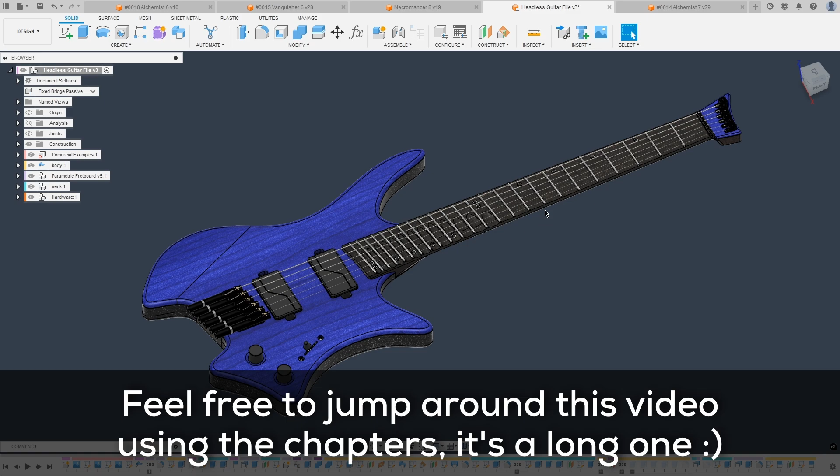Now I'm going to assume that you are already somewhat familiar with Fusion. If you've never used it before and want to get into it, there are many great beginner series out there. It doesn't matter what they're targeted to, you just need to learn the basic tools of sketches, extrudes, constraining your sketches, all of that stuff. If you don't know that before starting a guitar build, you're going to be in for a world of trouble, as there are a lot of components that quickly add up, and if you don't have the fundamentals down, it's just going to be one big mess.

But if you want to still have a guitar file that is fully functional without having to model it completely from scratch, for the first time ever, I'm actually releasing a fully featured headless guitar design. Now, I have modified it slightly from my designs, as I do sell those as built guitars, so I don't want to give you one of these direct design files where you can just send them to the CNC and build an exact copy. Instead, I want to motivate you to take the complicated bits of modeling, all of the joinery and everything, but then just modify the shape, create your own headless shape. It doesn't have to be worlds different, just a little bit different, and that way we can continue to evolve and everybody can have their own look. So that is basically the only thing that is different.

It's just the outline shape compared to the models that I use as well. It also has some basic configuration options here, like you can switch between fixed bridge and tremolo, and when you select that, it will automatically play some tricks in what it hides and unhides in the timeline. I will go more into that later. And then here you can see that's the tremolo option, and you can have it active or passive. That just adds or doesn't add to the battery cover here.

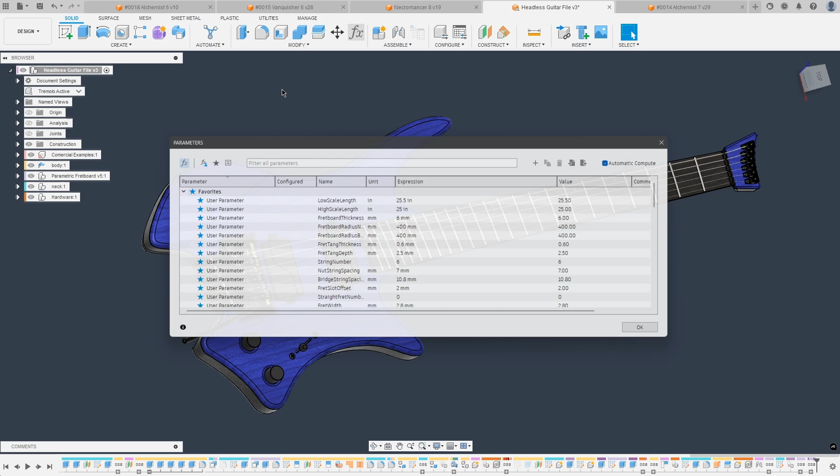What you can also change in here are a bunch of parameters, like for example scale length and various other things like that. However, changing some of those will somewhat break the model in some cases where you have to go back and fix a couple of steps. But I will show more about that later in the video as well. I just want to show you that you are not stuck with the basic design. It's quite adaptable as far as possible. I made it parametric, but with such a complicated design, it's not always possible to keep it fully working all the time.

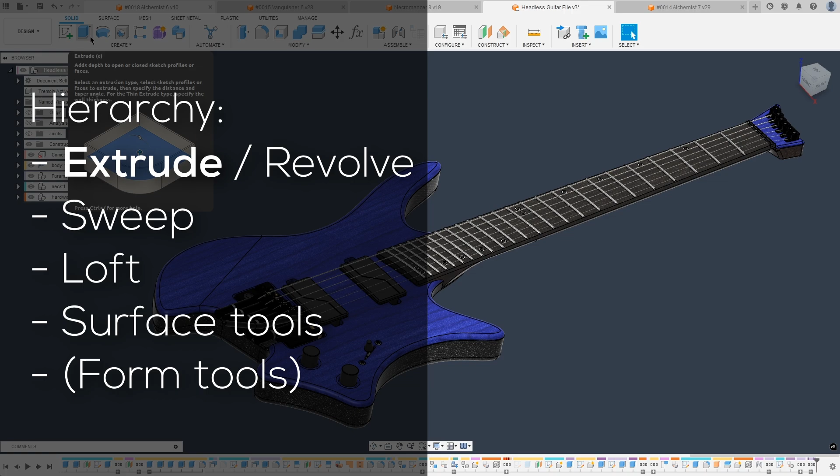The basic hierarchy in terms of how stable the feature is, how parametrically reproducible it is — Extrude is the best. You just have a geometry and say how far, all that good stuff. Unless you go into the sketch and start deleting lines, it will basically not break. When you delete lines, you may have to go back in and reselect some stuff, but even that is easily fixable — there's basically no way to screw it up.

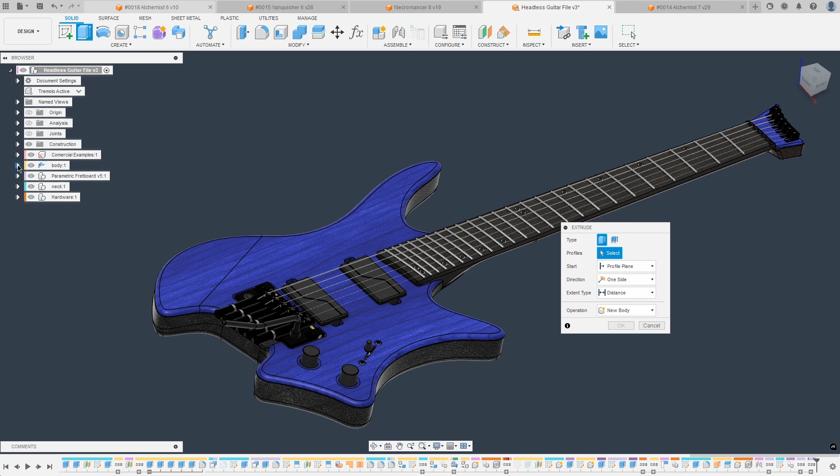A couple quick things inside the extrude menu. Most people will just use it like this — if you have the main outline, select something and extrude it however far you want. But there's actually a lot of features in here.

For example, you can not just start at your sketch plane, but also have a fixed offset that gives you a value, like 5 millimeters later. But the much more powerful option is 'object' — you can say you want to start at this height, and then it starts at that height. If you later move this object in the timeline, or it becomes higher, it will also adjust and start higher. So if you don't want to start at a sketch plane, choosing object is always the better option compared to offset, unless there's no object to reference.

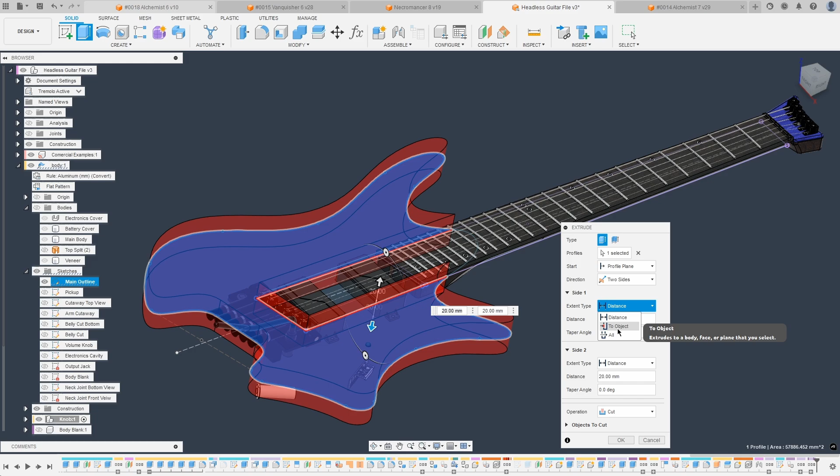But even in object mode, you can still have an additional offset. And in extent, you have distance as the default, but you can also go to object, and that will extrude as far as to that object. If you're in distance mode and select a plane, it will adjust, but that becomes a fixed number — it will always be that distance, and if the object moves, this will not adjust. If you want it to adjust, click to object, and then you can select the same thing, and that will automatically adjust later.

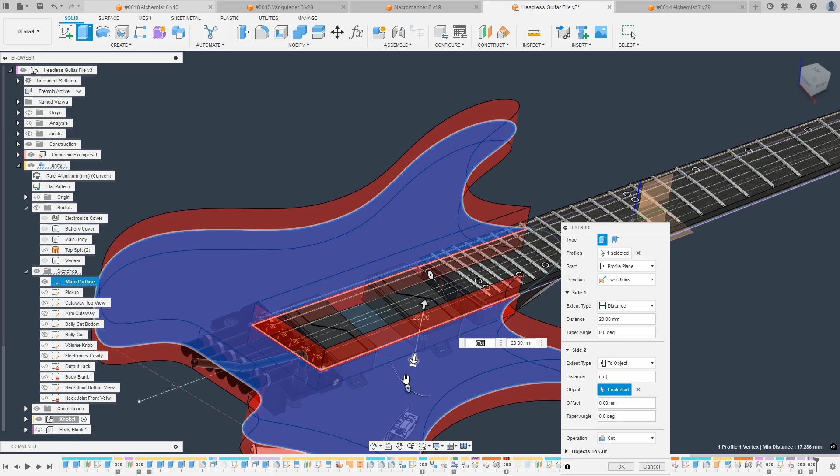Similar to extruding is revolving — that's just for circular features, but it's basically on the same level of stability. I don't use this very often in guitar design, but if you have more circular objects, that's a good choice too. It's often a choice between revolve or extrude: either you model it from the back and extrude it out to get the cylinder, or model it from the side and revolve it to get the cylinder. Both are valid options, and it depends on whether you have more geometry you want to add from the side or not.

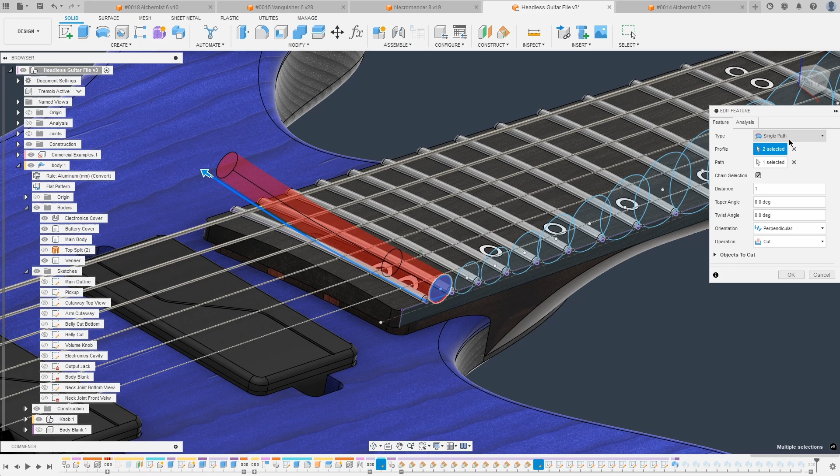You can play around with that, what is your preference. Then the next one down the list, I would say, is sweep. You can just get it here as sweep, and here you can select a path, and then you select geometry, and then instead of extruding just straight out, your extrusion will follow that path.

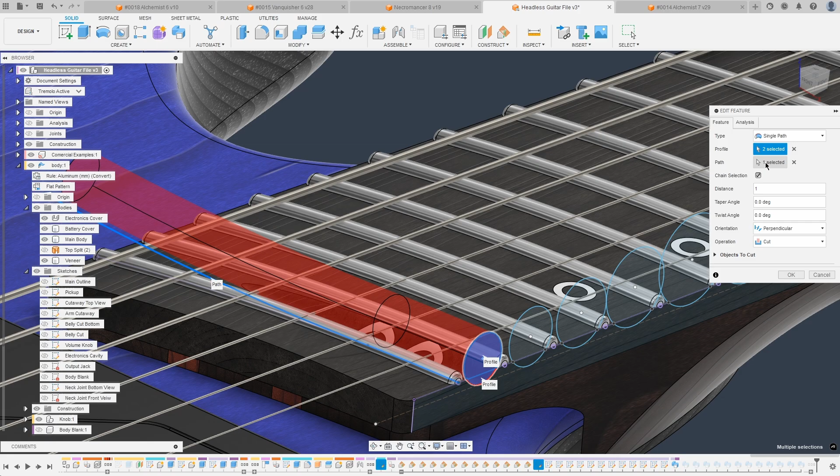Here the scallops for the fretboard are one example where I want them to just kind of have this circular shape, but they need to follow the curvature of the fretboard and then kind of exit out in a nice swoop. So I designed the side profile view, that's what you select here as profile, and then the path, and that is a separate sketch. And then you select those two, and if you ever change those sketches in the future, then this will also update very predictably.

Now you can just select one path, or if you want to have it adjust more, you can also select path and guide rail. So when you then select the second one, for example, if these two paths are slightly diverging, then the profile will scale accordingly. This allows you to create some quite complex geometry, but the more complex you get, the higher the chance is that it breaks if you change something further upstream.

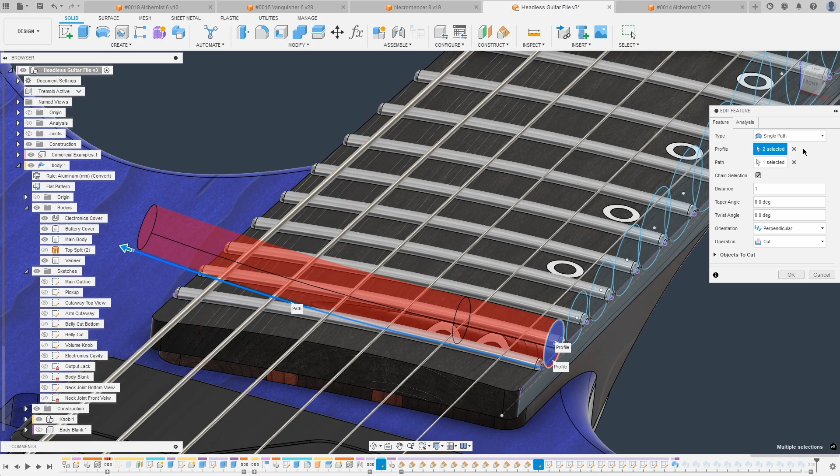Very similar to sweep, and a thing that I actually use almost more often than sweep, is the pipe command. It is basically a sweep command, except your profile is always a circle. This is how I did the strings here, for example. So for these strings, I just have a sketch that is kind of the line where the string will be, and then in here it's very easy. You don't have to create a sketch for the circle. You just select your path, and then you select a section here. It can be circular or square, and the section size.

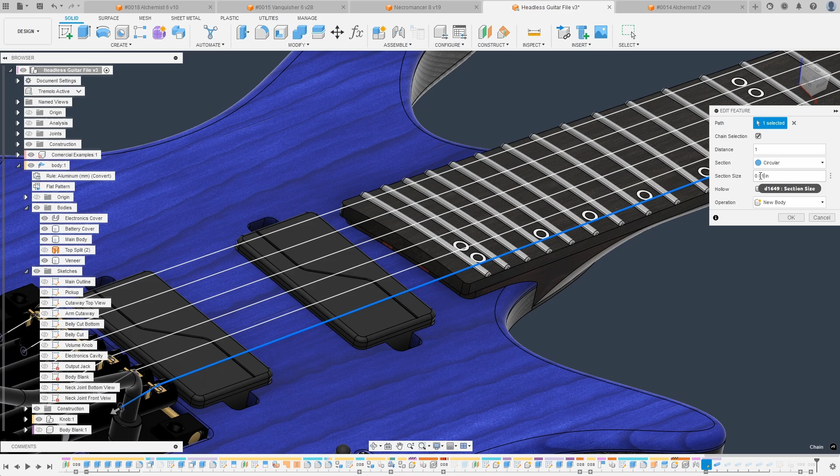So here it will be 0.01 inches for a number 10 string. By the way, if you don't know the translation, the string number to the size is just in 1/1000th of an inch. So a 10 will be 0.01 or a 100 string will be 0.1 inches.

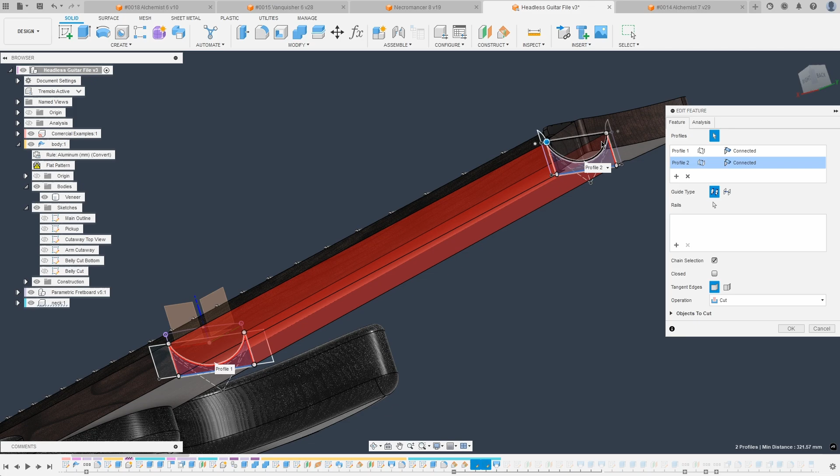Moving on to lofts, we are getting into much more powerful territory, but also into much more dangerous territory where you have to be a lot more careful. One example in guitar design where I use lofts a lot is for the neck. And here you can see the main part of the neck, which is basically a simple taper from one profile at the nut to a different profile around the 12th fret is where I designed it here, but it could also be further up or further down depending on how you want to design it.

This is an example of a loft that works very well and is quite safe, because essentially we have two profiles that are very similar to each other, and it's perfectly clear for the program that this corner is going to go to that corner, this arc here corresponds to that arc, so it's very easy to connect it, everything matches up, there's no ambiguity, and you'll get nice straight lines in between, and the geometry will be as you expected.

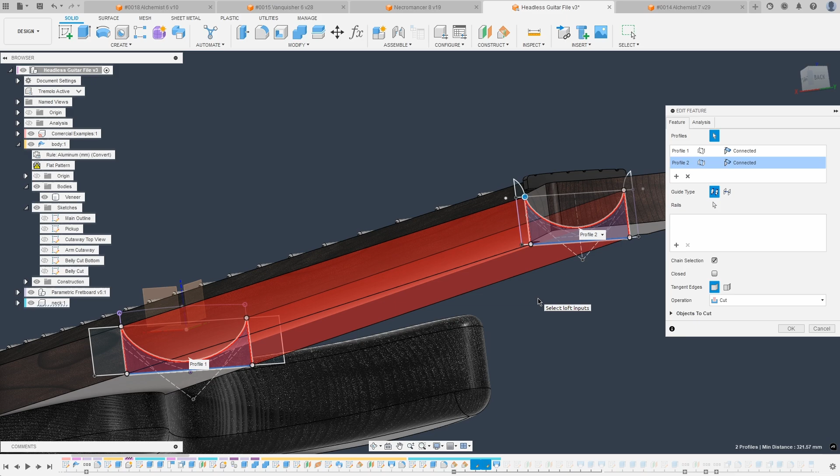However, if you have different shapes on both sides, then it kind of has to guess what part goes where. So the more different the shapes are, the more complicated it gets, and the higher are the chances that you're going to get some weird geometry that was not what you intended.

So moving on just a little bit here over to the heel, that's already a slightly more involved example. We still have fairly similar geometry. You can see that here we have an arc and 3 straight lines. Once again here we have an arc and 3 straight lines. But it's getting a bit more complicated because it's not just straight. Instead we are moving in different directions.

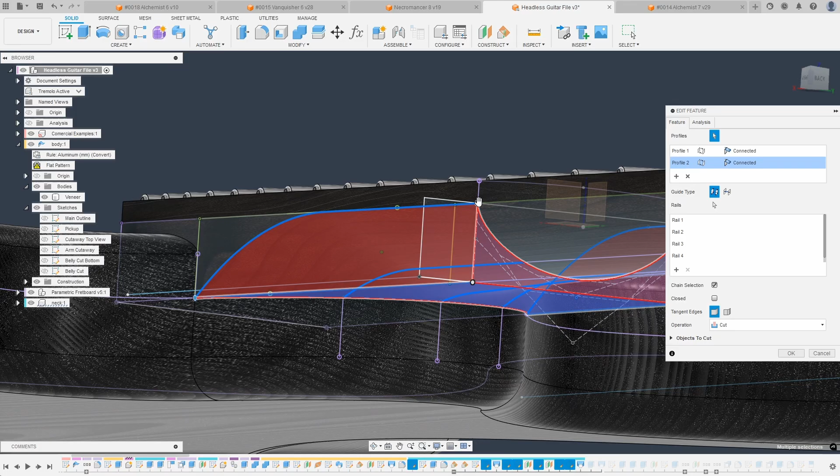So if I just have these two selected, then it will create some really weird geometry and it's not going to work well. So what I had to do here was add some rails. This basically gives Fusion some information of how you want to connect these two profiles. So you usually want to have some at the ends, and then sometimes you will also need ones in the middle. So let me quickly remove some of them.

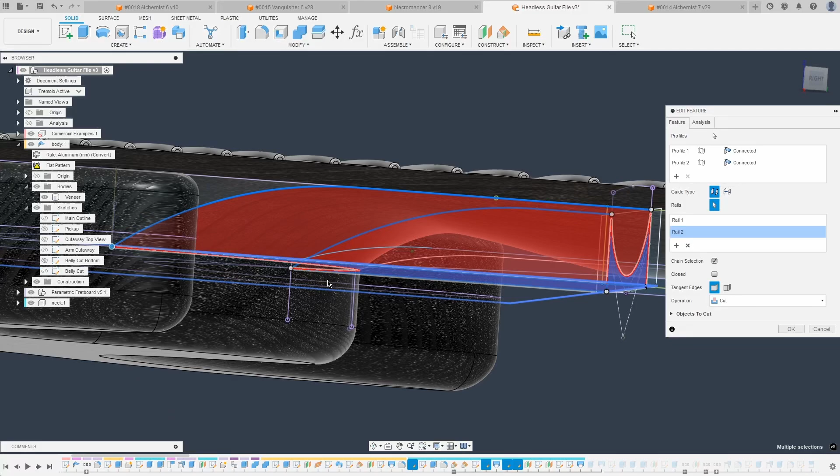So now you can see that it still connects the ends nicely because I still have those rails selected, but here it wants to create some really weird geometry going up into here. That is of course not how I want to connect these two, but that's just the way Fusion thinks, that's how it works.

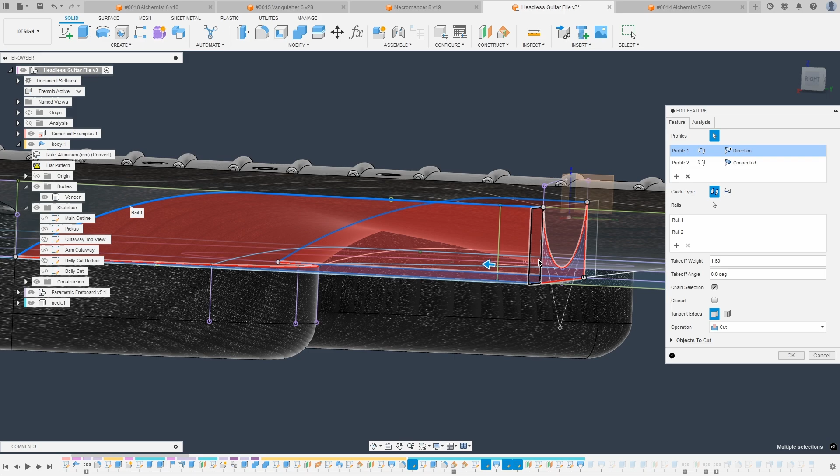Now one way to correct it is by choosing here, instead of connected, where it just connects to this profile, you can choose direction. And this will give you kind of a vector of how much it should follow that direction. But here in this case, that does not work very well. You can also, instead of selecting a sketch to loft from, select a face, and then it will give you some more options here that you can play around with, but in a lot of cases, it is quite finicky.

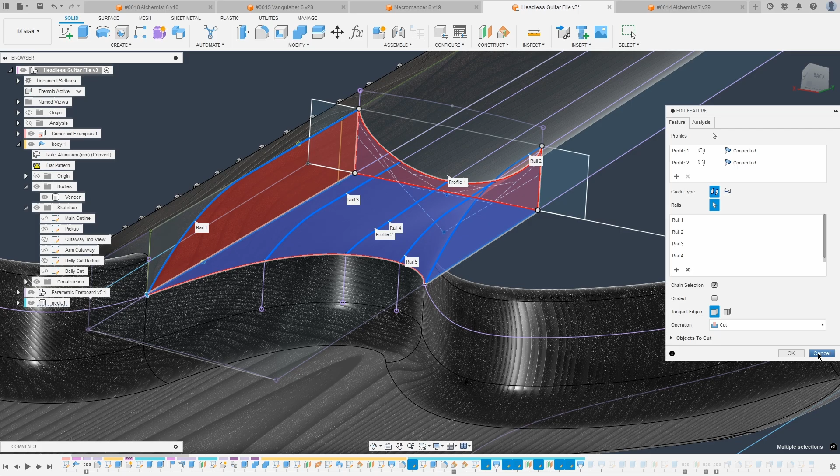But using rails, when we start adding these back in, you can see that it knows how we want to connect it, and then it will do those. How many rails you need is kind of something you have to play around with, to see how you get the geometry that you want. It can sometimes be a bit difficult to see exactly what geometry you are getting.

So I find for guitar design, applying a 3D wood material to it is a really good way to see, because then you have the grain lines, and you can kind of see the curvature of things based on how the grain lines act. There's also more artificial things like zebra that stripes it in specific ways according to curvature, but those require a lot more getting used to. So using wood grain is a really good way to visualize it, as it corresponds to the real world object that you already know.

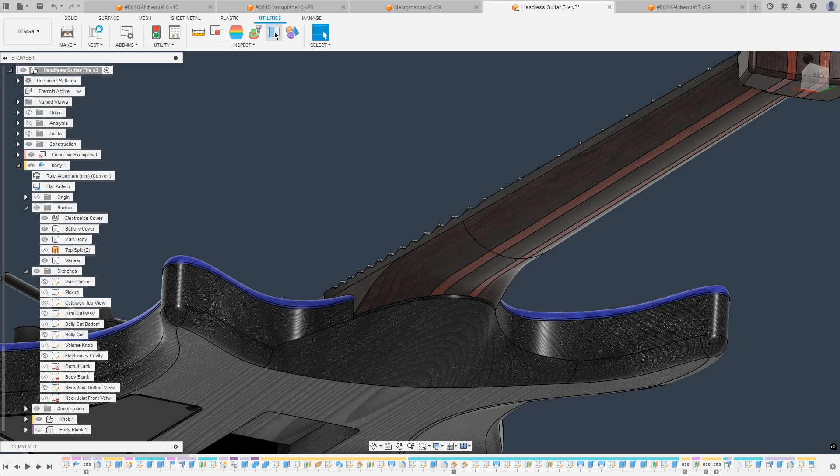Another thing that I sometimes use is section analysis. So that's this tool here. Then you can select a plane and see how the section looks, and that's a really good way to check if stuff is parallel and stuff like that. But that also gives you only a limited view.

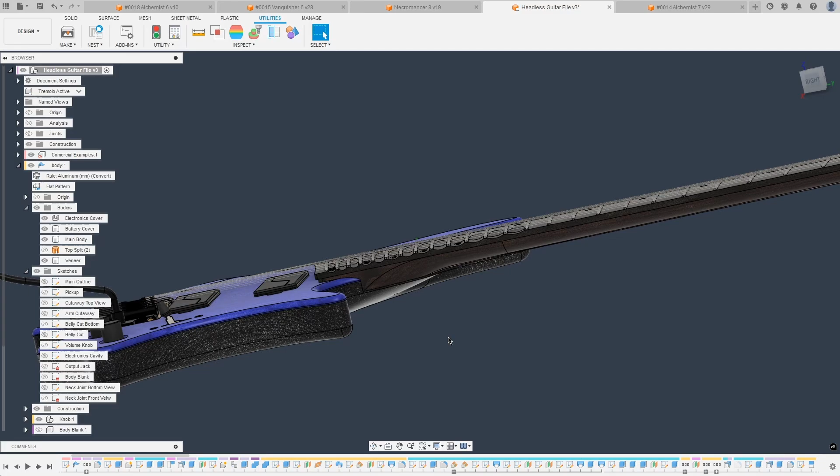Then finally you will run into some geometry that just does not work with lofts. You'll try but fail, and Fusion doesn't want to properly compute it because the two profiles that you're trying to connect are just too different. For example, this joint here, I want to create a very smooth transition that connects all of these things, and there's just no good way to model this with a loft and get this shape. So in those cases, you can go to the surface tools.

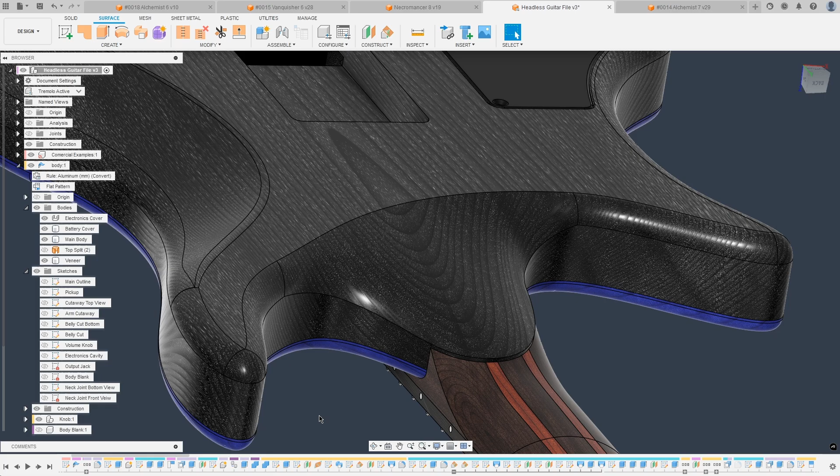Now these tools can be great, however they basically don't really update with parametric stuff. Sometimes you can get them to update, but in a lot of cases you will have to go back into each one of the features and reselect some stuff and make sure that they are updated correctly whenever you change something further upstream. Like if I want this line further in, I will have to go into the operation that creates this shape and change it.

Giving you a full surface tutorial is not within the scope of this video, but I can quickly show you how I make this joint. Let's roll the history marker back. I just have the basic design without the heel joint, so basically what you would buy from Fender. And then first I have a sketch here that defines the line that I want to go to here.

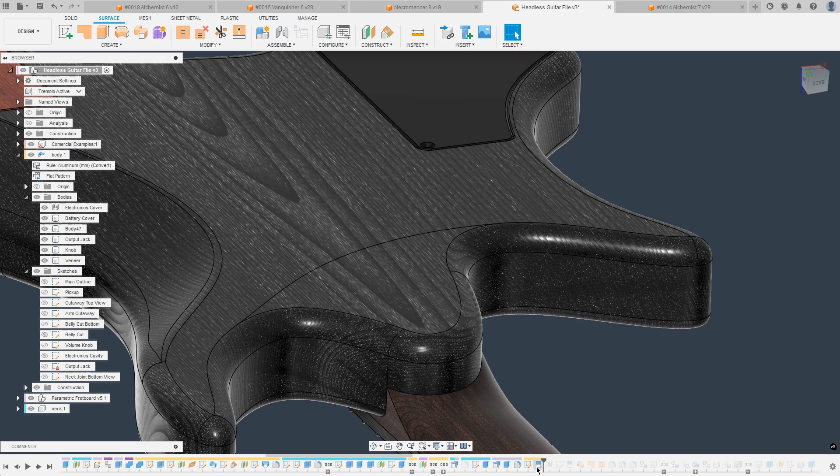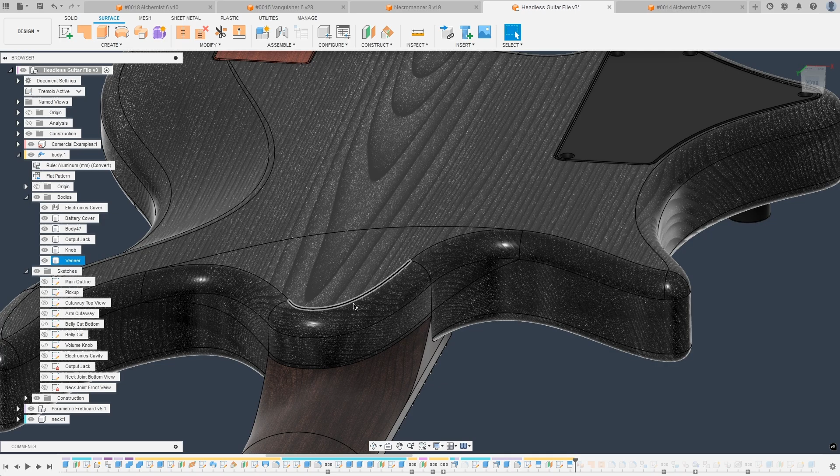And then I use the split operations and I'm splitting a face. This will essentially go from having a solid body into splitting stuff up. Then I create some more helping geometry and split some more faces here. That is basically a way to outline what I want to later cut away. Then in the next step, I select all these faces and I delete them.

Now this is where you deviate from solid modeling, because this is no longer a solid object. You can see the insides of these faces and the geometry. So this is not something that you could 3D print or make with a CNC machine anymore. But later we will make it back into a solid object.

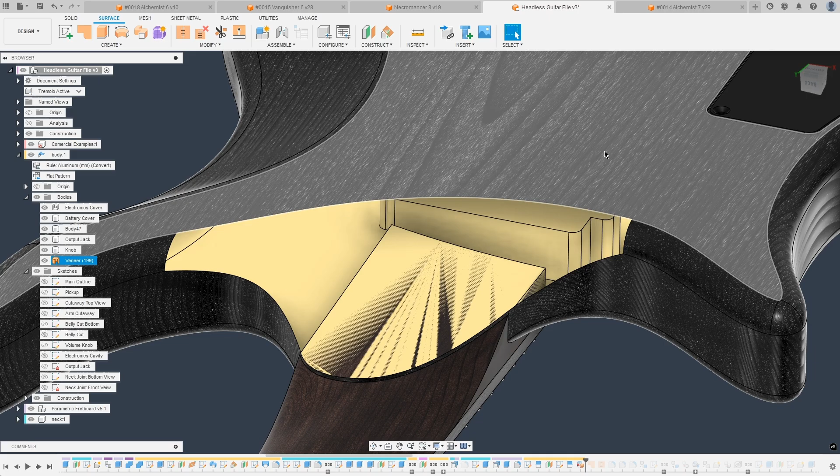Then the next step is to create this surface here. And here you can just select all of the edges and then Fusion will try to connect them in the best way possible. Now, just like the Loft, this is in a lot of ways imperfect and it can work well if it's obvious, but if it's not obvious like this, then it will require some finessing.

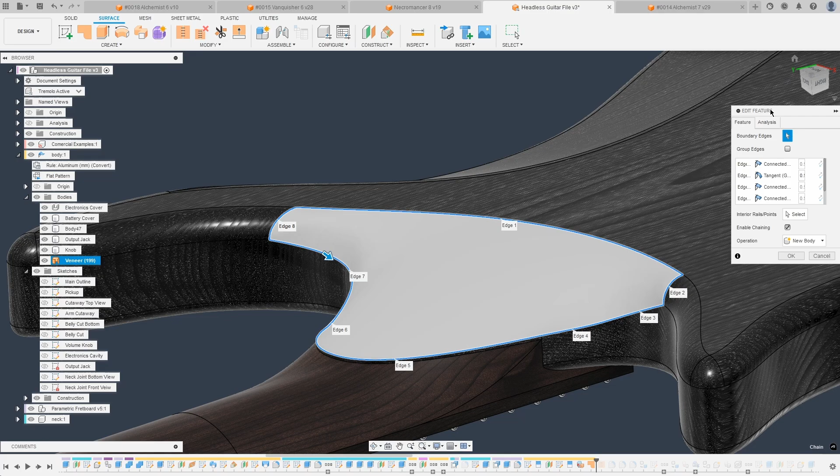The main way that you can influence the shape of this is either by using interior rails, just like in lofting, but a lot of times this will break and it will not be able to compute it. So I don't use this very often. The other thing is you can set tangency.

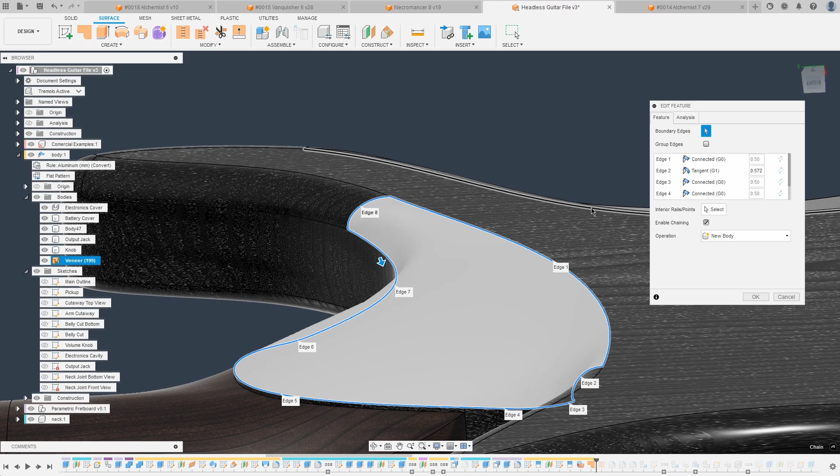On certain lines, you can say instead of being just connected, you want it tangent to how the previous surface was. So for example, if I chose edge 2 here, which is just connected because I want kind of an angle here, and I go from connected to tangent, then you see it will make it tangent here to this surface and of course balloon it up. But then you can also say how far you want it to follow that tangency.

By doing that selectively, you can kind of massage the surface in, but it's also often really hard to properly see what exactly the surface looks like. And then finally, this is also not a perfect surface here for the joint. I am machining this as I modeled it here, but then later go in by hand, smooth over these corners, cut it in nicely. Also change that transition in here.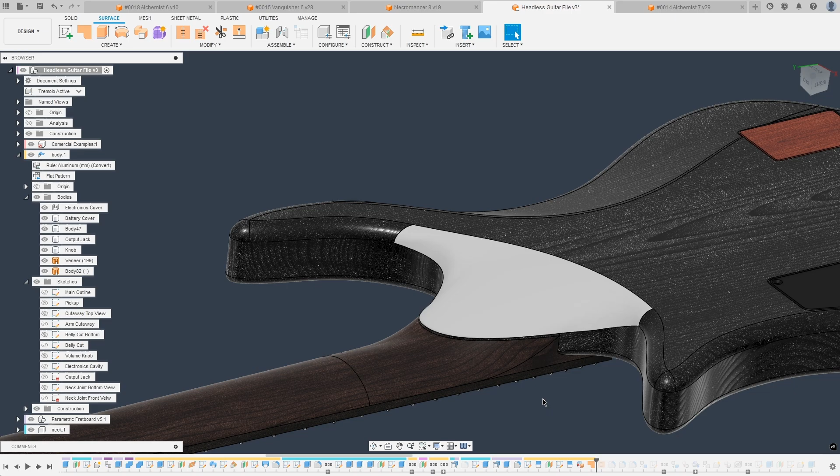It's just not worth the trouble to try and model that perfectly inside of Fusion when it's much easier to just use some hand tools and finesse it until it feels good and doesn't just look good in the model. Then lastly, to get back to a solid body, you have to use the surface stitch where you just select multiple surfaces, and if they form a continuous body, then you are back to a regular body here, as you can see with this.

And essentially with those basic shapes that I just showed you, you can create everything. All of those together are basically all you need, and the surface tool is definitely already a bit out there. Now you can also use these mesh tools or more like form tools. I have not used those a lot, and there you are definitely outside of what is parametric. You can just pull on corners to create your shape. If you want to get into that, you will have to check some other channels for tutorials because I really don't know how to use those.

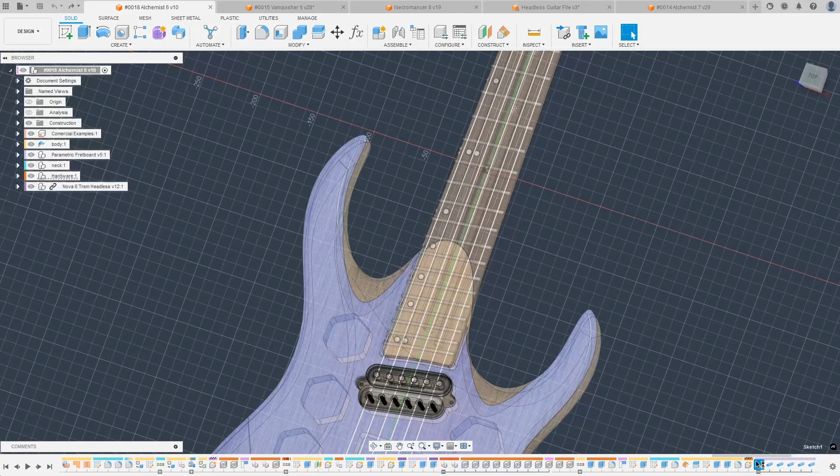Now moving on to something a bit more light and fun that might be new to you and can enable some really cool stuff, but it's also kind of dangerous, and that's 3D sketches. One example here where I'm using them is for the strings, and let's just jump into the sketch here. The way you enable 3D sketching is just in the sketch palette here, you click on the 3D sketch icon after you've created the sketch, and then you will be able to not just place sketches on the plane that you designed them on, but also up into 3D space.

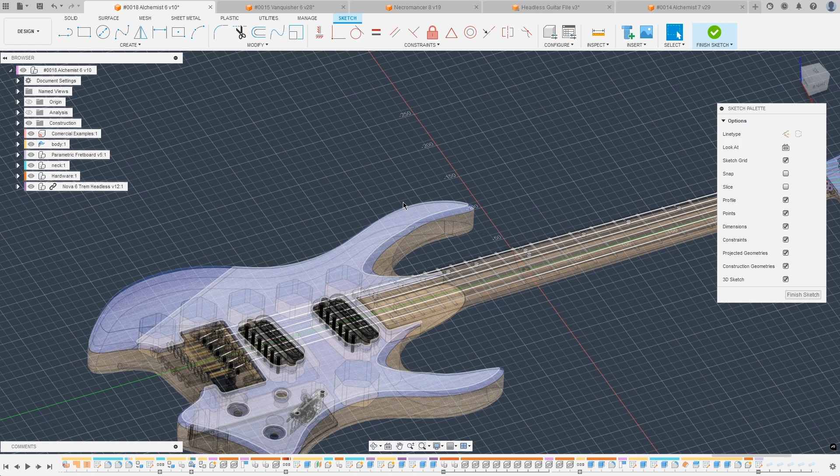Now, since you are using a 2D screen and 2D inputs, it is really hard for Fusion to know if you click here, where in 3D space you want that. Do you want that here on the surface? Do you want that floating above the fretboard here? That's why 3D Sketch is very dangerous, and you can quickly create geometry that is completely different from what you intended to do. So I really only ever want to use 3D Sketch when I'm able to fully constrain my lines. So I'm using the geometry that already exists as reference points that I project into it.

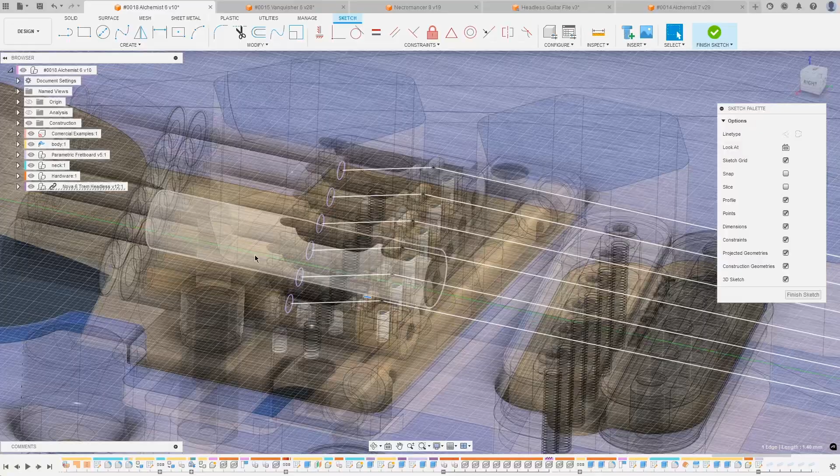And actually, if you project into a 3D sketch, it's not going to pull it up to the line, but just going to give you the geometry inside of your sketch. So I have here from the barrel and then moving to the point where the string sits on. Then here at the nut, I have all of the points where it interacts with the nut.

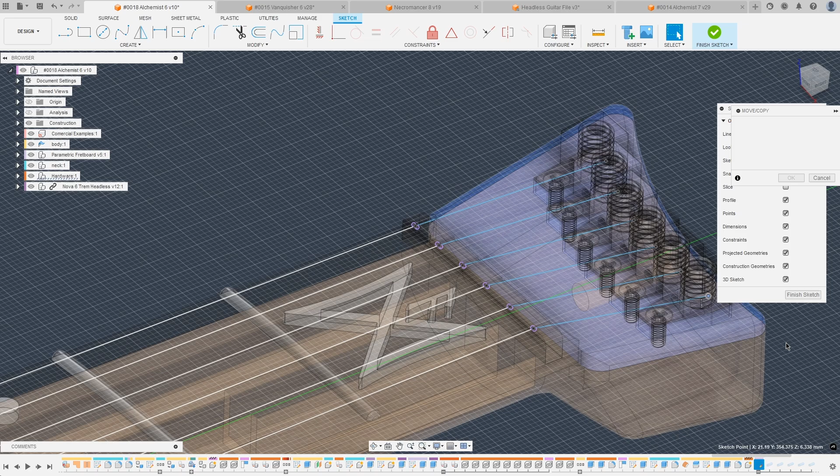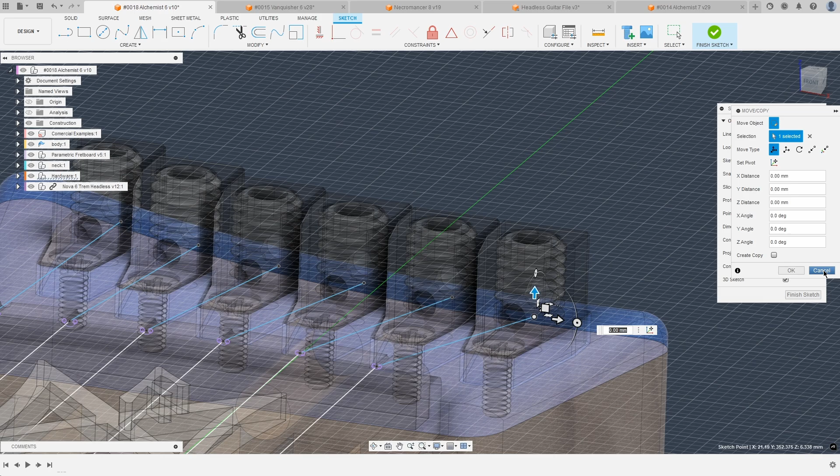Okay. So now that I removed the constraint here, I can move this point around in 3D space and adjust where it goes. That's basically the only way that you're going to be able to create your geometry if you're not snapping it to points, by just pulling on here and moving it this way, because dragging and dropping just does not work. But you can still use all of the other constraints like horizontal, vertical, parallel, equal, all of that stuff. That still works as well.

Then once you're done, you can simply use these 3D sketches, for example, for pipes or for sweeps. That's really convenient. Another place where I used it here is the arm for the tremolo. As you can see, it goes up and bends in different directions, and that was just much easier to create with the 3D sketch. But otherwise, I try to use them as little as possible, just because they are so finicky.

The next tip is a little bit more of a serious one again, and that is about staying organized. Now, it might not be sexy to talk about organization, but it is very important. If you have a design as complicated as a fully modeled guitar, if you are not organized, it will be a pain to change anything. Now, it took me a lot of revisions to get to these files where I am now, and I went back a bunch of times.

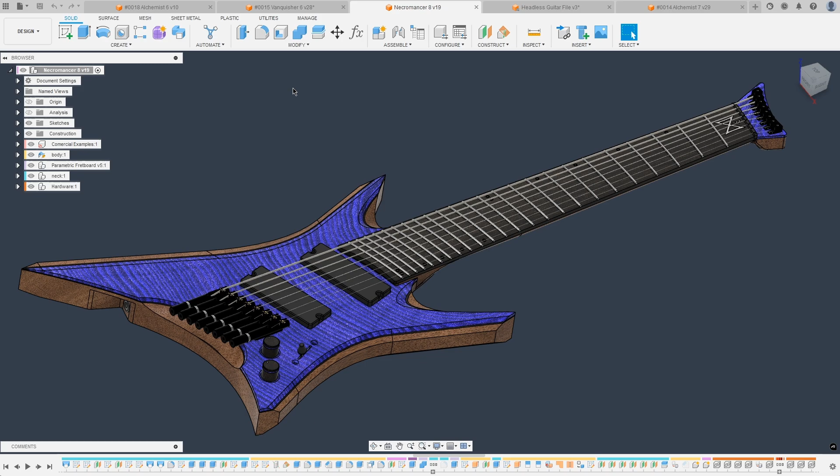I had to restart sometimes, and basically the premise I landed on is having components for the major components, for example the body, the neck. Now, the fretboard here is actually a separate component, and that is because I have a master fretboard file that I just insert and then use as the starting point for modeling a new guitar. This way I don't have to remodel the fretboard every time I design a new guitar, because it's very similar, and you can also very easily use it with parameters.

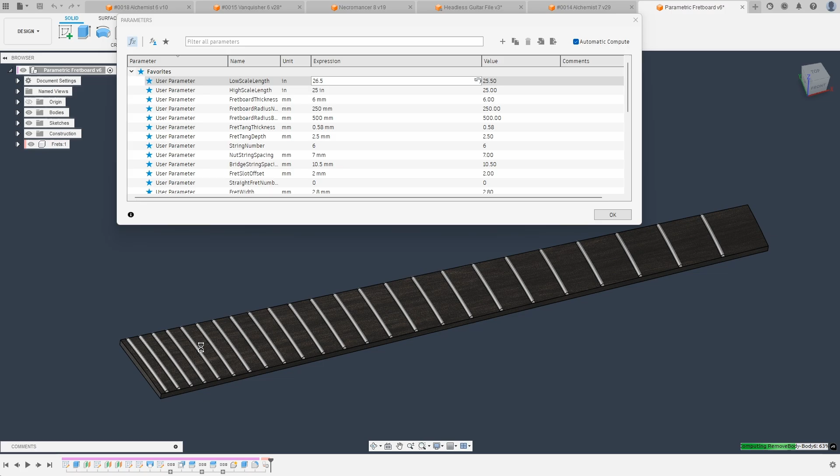And here it is. This is a model that is basically perfectly parametric. It sometimes can break if you change parameters in a weird way, but you can always go back and change them in a different order, and it will work. There's no crazy stuff going on in here. So I can set the different scale lengths. Let's say instead of a slight fan, I want a much more aggressive fan. Let's go to 26.5 inches here. Hit enter, and then it has updated to a much more aggressive fan.

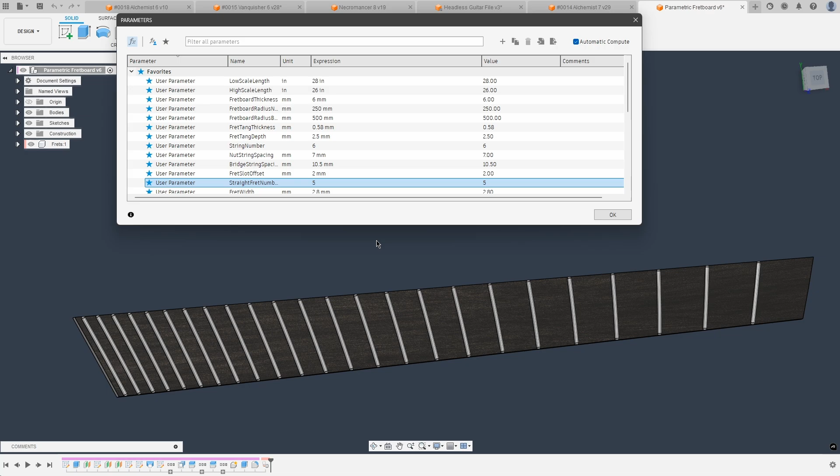But now I probably don't want the 0 fret here at the nut, but instead let's put it maybe to the 5th fret, and that broke it. So yes, as you can see, it can break sometimes, but if you just play around with it again, it finds its way again. And now we have a nice fretboard here, 26 to 28 inches, with a neutral fret at the 5th fret. And then I can just insert that into a new design and start my guitar around that if I want to design a guitar with that scale length.

And it appears that Fusion has just crashed. This demo effect is really not going too well. Huh, no, it did not actually crash. That's cool.

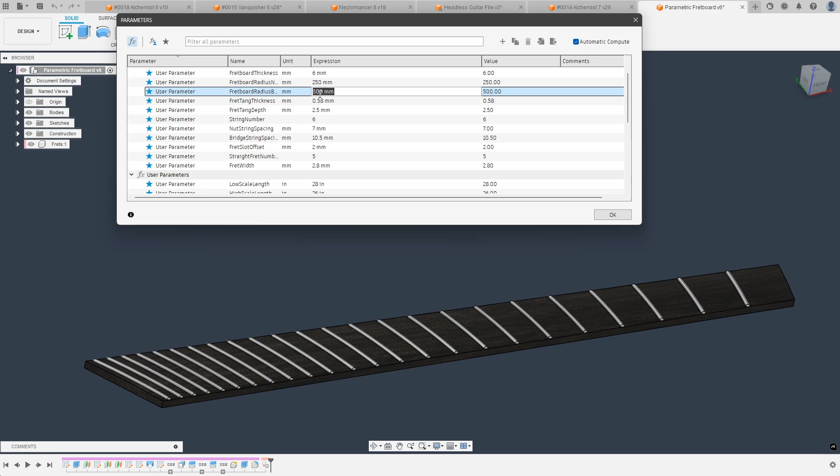Some of the things you can set in here are the fretboard radius, and it's fully compatible with compound radius. So if you want just non-compound radius, just set the same one for bridge and neck, or here I have going from 250 to 500 millimeters compound radius. I don't actually usually use compound radius on my actual guitars, but this file here supports it as well.

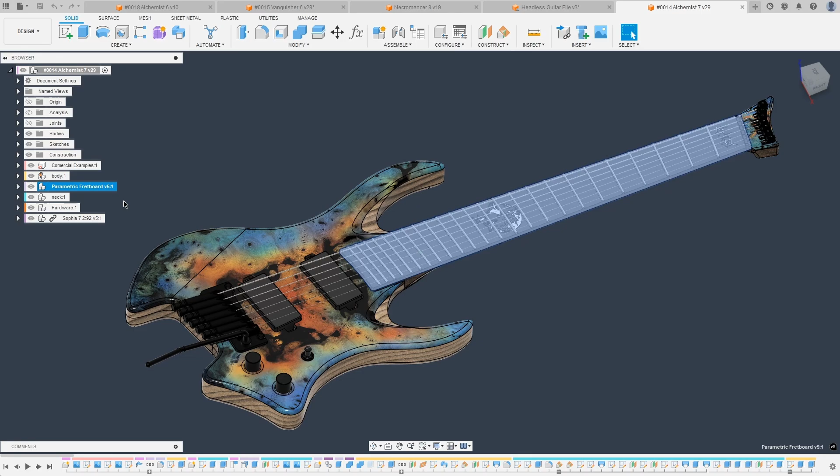But that's enough for that. That is one good example of how staying organized can save you a lot of time. Not only am I using different bodies here for the different things, by having something that stays the same for basically all the guitars modeled separately, I can just simply insert it. Same goes for all of the hardware, like the bridges, the headpieces. That is all a separate model that I then insert.

Now this can also be a double-edged sword, because if you then go back and want to change your hardware slightly for one of the builds, then basically in all of your guitars it will want to update it. It doesn't automatically update stuff if you change it, but you will get this little symbol here to update the component to the latest. So here I think this guitar, which by the way the video should be out hopefully next week about building this guitar.

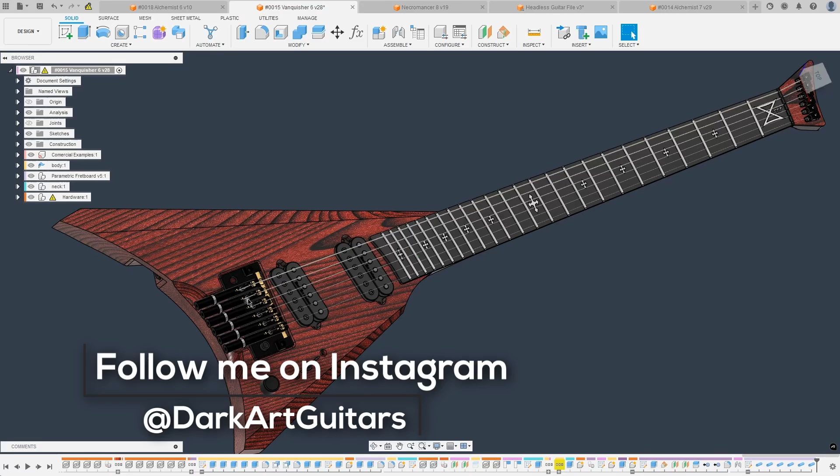Here I modeled it earlier when I did not have the trem arm included in this bridge design, but then I later added it, so this is out of date now. Now I could update it, but since this is an older design, I'm just going to leave that alone. But that is something to keep in mind.

I also like to have all of my hardware in a separate component, and this is primarily just so I can simply hide it. You can see that here I actually have a mistake, and that should also be in the hardware. But this way I can simply get all of the hardware out of the way if I want to prepare the model for CNC machining, for example. And then inside of the hardware, a lot of it is also directly linked outside. I have of course the bridges, and also have the pickups modeled separately.

That also means that the file that will be available for you is going to be a single archive file from Fusion 360. But when you upload it, I recommend uploading it to a new folder. That way you get the main file, but also a file for the Nova trem, a file for the fixed bridge, and inside of those files things like these tubes are once again linked to a separate file. So you will also automatically get all of those.

For the pickups, I just have some Fishman Fluence as an example in here. But of course, if you get my pickup design files as well, you could insert them in here and change the cutout shapes to match that.

Another thing you want to be conscious of when designing is to minimize the number of sketches you are using. It is very tempting in the beginning to just start a sketch, draw what you want, and then you're done with that sketch. And then if you want to add a hole into this outline, for example, you create a new sketch on top of it with that hole. But in the end, you're going to end up with 50 sketches. And unless you've been very diligent about labeling them, it's going to be really hard to know what sketch did what.

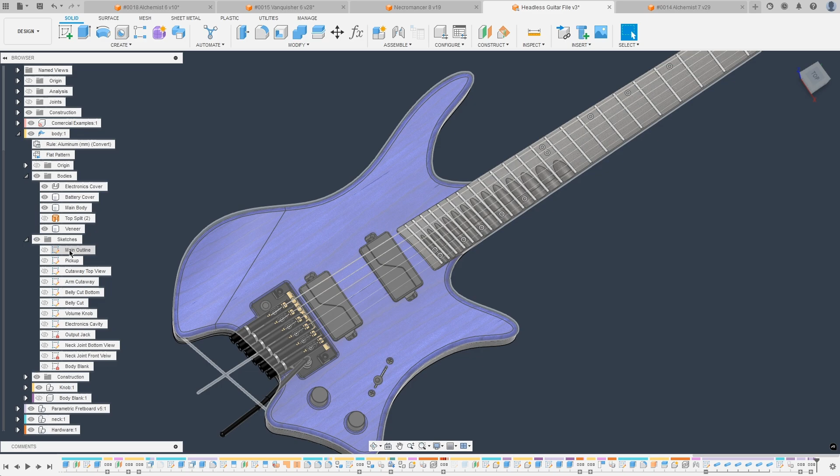On the other hand, you also don't want to overload your sketches. You don't want to have one sketch that defines the outline of the shape, but also defines the inlay and the pickups. That would be too much, and the sketch would not really be usable. So you want to stay within the domain of the component, but combine as much as possible. You can combine that with the different extrude features, where you extrude from the profile plane, but also with an offset or from an object. This way you can have one top-down view and use that for all of your top-down body sketches, all in one.

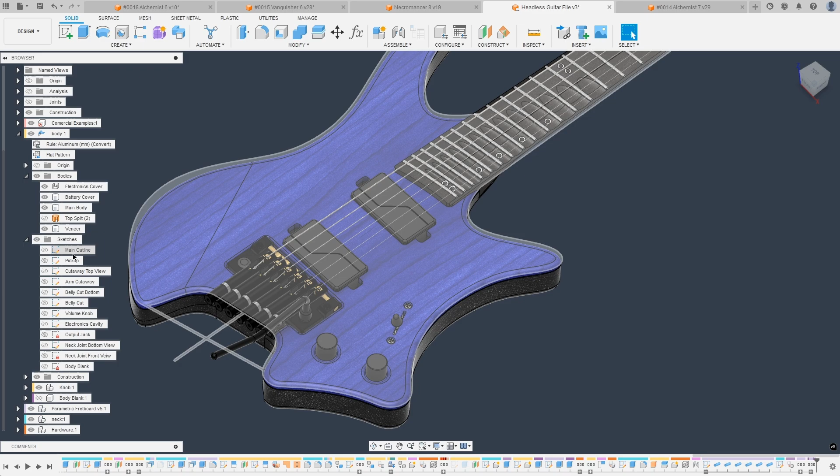The other thing, of course, is labeling. You can label sketches. Please label your sketches, otherwise you're going to have no idea what you're doing. What is less obvious, down here in the timeline, you can also keep order. You can see that this is a very complicated design, but I barely have to scroll to see all of the different timeline options. And that's because I'm making heavy use of groups.

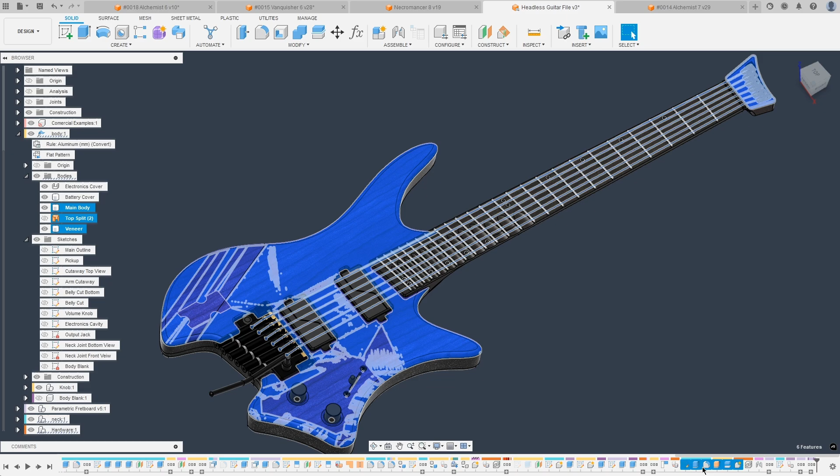If you select with just Shift, a group of operations, you can right-click and Create Group. This creates one of those folder groups, and you can also right-click to rename different operations. Now these names don't usually show up, but if you see a bunch of groups and you want to find which one was, say, the scallops, you can just hover over it. So here I see this one is for the partial scallops, so I can right-click and suppress these features, and then it's gone. Inside the group, all of them will be suppressed.

That's a good option. You don't have to delete stuff, you can just suppress it, and that means it will not be considered in the computation. But then you can simply hit unsuppress and it is back.

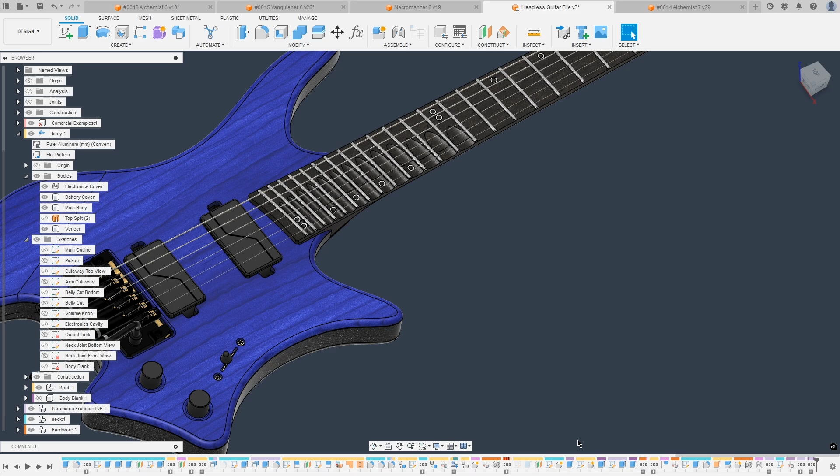Now, if you have later things that are dependent on it and you suppress it, they will also be suppressed. For example, if I take the outline sketch in the very beginning and suppress this sketch, a whole bunch of other stuff also gets suppressed because it's all referencing that sketch that now doesn't exist in the computation. So that's just something to keep in mind and be careful of.

Then the last design trick, which isn't really a trick, it's a basic feature of Fusion - it's how it's parametric and how everything is computed, and you can go back. Instead of having to go back into your extrudes and sketches all the time, if you have things you might want to change but use in a bunch of different places, it's a really good idea to have parameters.

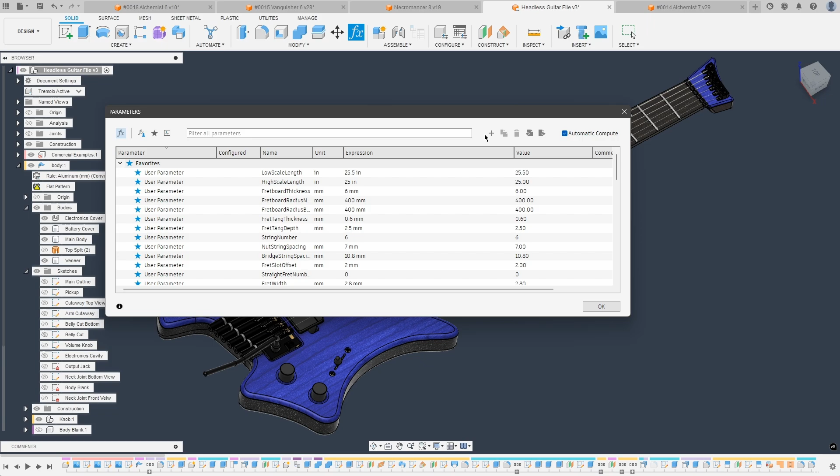If you don't have this here, you can go down and change parameters. If you click on the hamburger menu, you can pin it to the toolbar. In here, you can just add something and give it a name. For example, these here are all from when I imported the fretboard into it, so these are the same options you see here. But I also have a couple more, like the body thickness, pickup depth, stuff like that. It just makes it a lot easier to change things and go back.

But of course there is a caveat, and that is some stuff will start breaking if I change the design here too much. For example, if I now change the scale length to go all the way up to 27 inches, let's give it a second to recompute. As you can see, a whole bunch of stuff broke - there's 26 warnings, 15 errors.

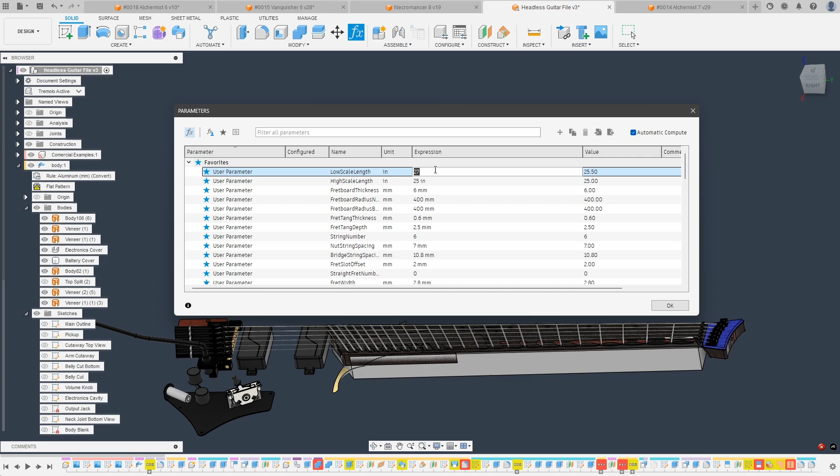Now this might seem intimidating and you might want to just stop here and go back, but in a lot of cases it's just one or two little things you have to reselect and fix, and then it will work again. This might be a bit of an extreme example since it starts colliding, but instead of 27, let's just go to 26, which might be more reasonable. As you can see, that didn't break quite as many things, but there are still a bunch of errors and warnings.

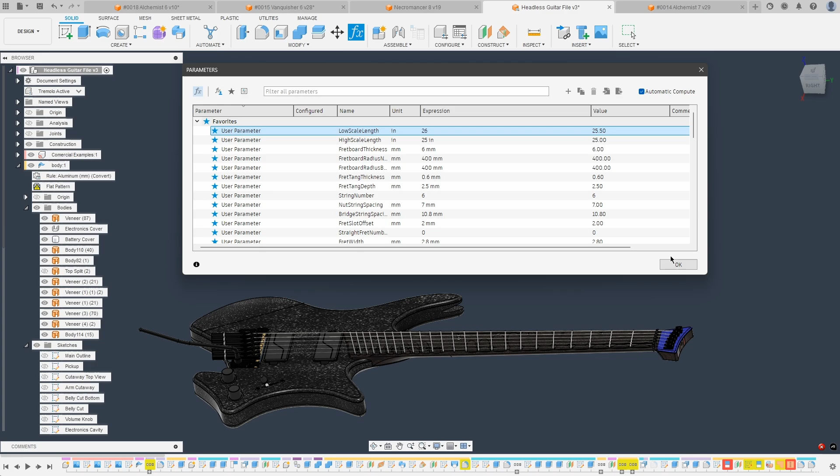So that leads me to my next point: how to fix errors, warnings, all of that nasty stuff inside Fusion. If you work with Fusion long enough, you will run into a lot of these errors, and learning how to fix them will save you a lot of time. Generally, you want to start as early in the timeline as the first errors appear, but not all errors are necessarily all that important.

For example, here, this is the fretboard design, and in this projection sketch there's an issue. You can right-click on it and review warning - that will tell you exactly what is wrong with it. In a lot of cases that's not that helpful, but there's a couple things you can have here. For sketches, compute failed is usually a common one - that's hard to know. It usually means something changed and it doesn't know how to compute it.

Sometimes these errors don't help you, but that just means you have to go into the sketch and figure it out yourself. But another common one would be missing points. That's if you deleted something in a reference sketch, or if you changed the body that the sketch was placed on and some of the references are no longer there. That would be an easy one to fix.

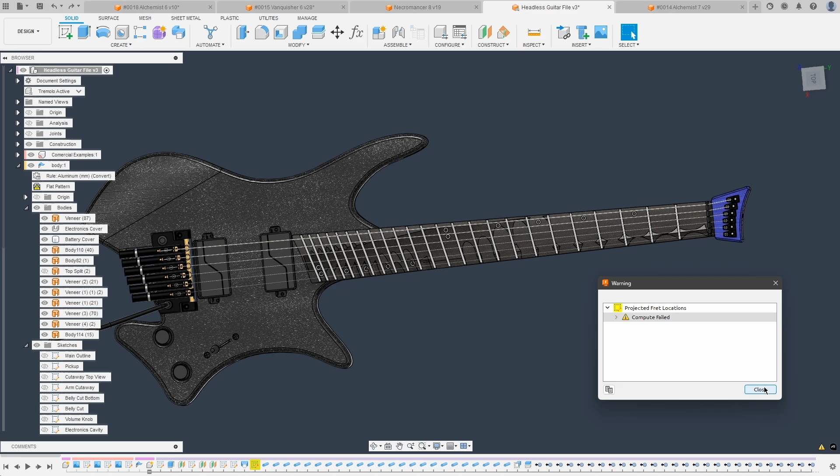Or losing the sketch plane is another one. If you changed the body and it kind of lost the reference, you can also reselect the sketch plane sometimes. But this one I don't think we actually have to touch for now.

So the first one here is actually not an error, but I know this outline, something went wonky. Here you can see that for some reason, changing that because I had a parallel here, moved this line around in a weird way. So let's just move this back a bit. I'd have to adjust this more finely, but this should do for now.

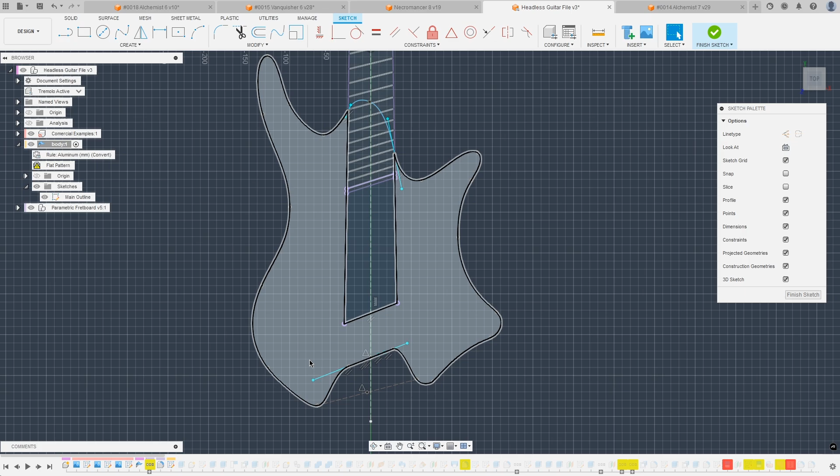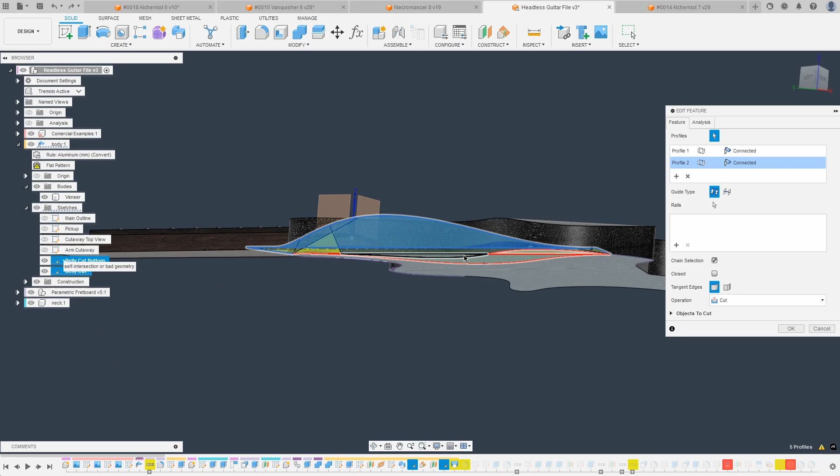Then just kind of looking for the next thing that is wrong, I see here the belly carve went wrong, and this clearly went wrong here. Looking into it, it looks like some of the sketches have changed, where these lines didn't used to cross where they now do. So here is a case I have to go back into a sketch, fix the sketches, and then I can reselect everything, and that would fix this.

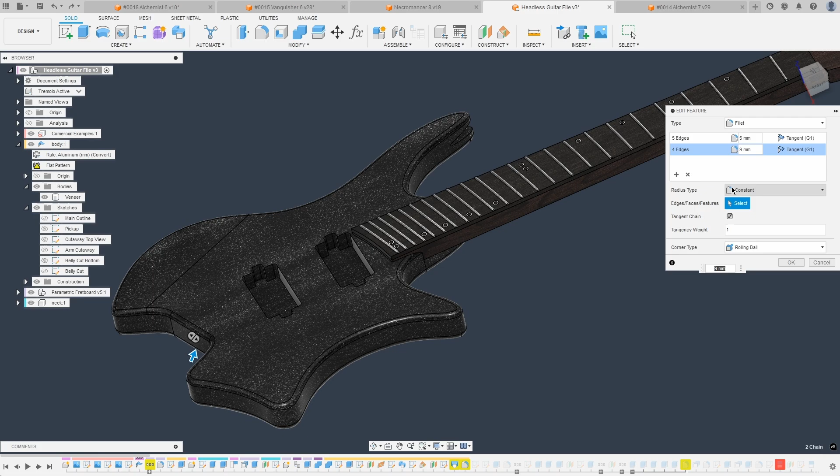Another common thing that gives you warnings would be fillets. In a lot of cases, that's just because one of the edges changed, and it actually updated it correctly. It just gives you a warning because it changed and it doesn't know if it was correct. But here, actually, it still looks perfectly correct. So you can just go in, click OK, and that got rid of the warning, because it just kind of reconfirmed that yes, it is still correct.

Then when you get errors like this, that's when you have to really do something, and that's oftentimes when there is stuff with kind of surface tools. So let's roll our history marker here.

As you can see, in this case, some of the lines have moved, and while it looked like they were still connected perfectly fine, somehow it was slightly off. Just kind of moving them and resnapping them into place has fixed this error in this case. And actually, the error was here on the split face, but the culprit was the sketch before it.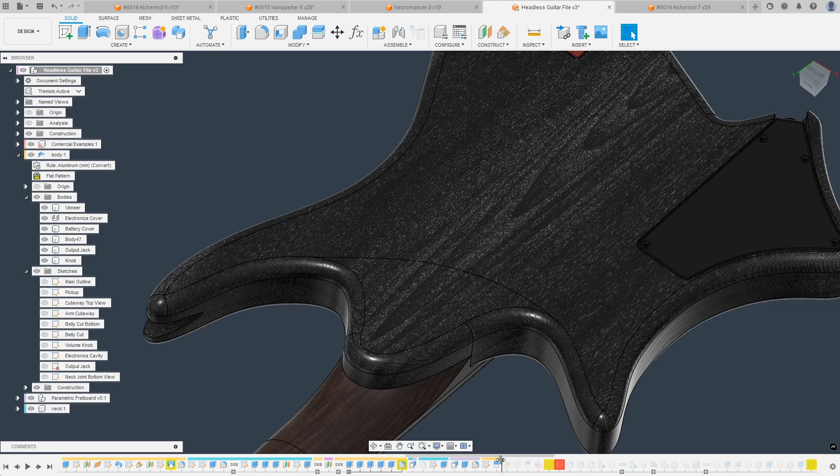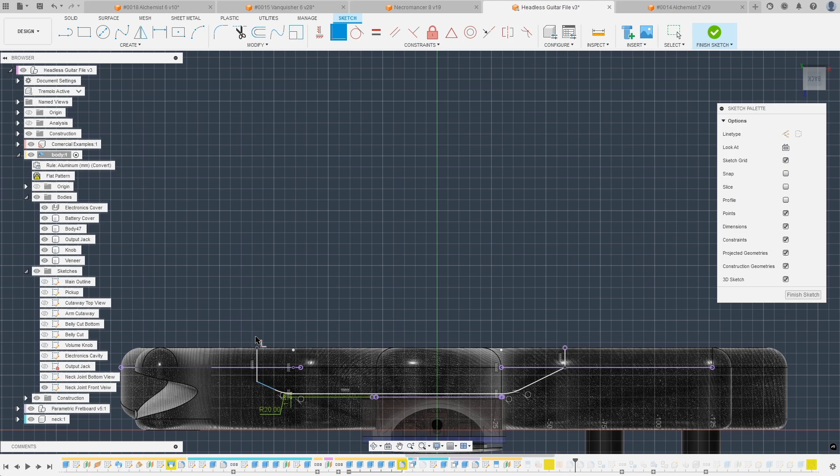Then moving forward, you can see that it updated, but here there's something weird, and here. And while this didn't give us an error, I can already see that the delete here didn't work. Actually not just the delete, but also this split face went weird, because here I think, yes, this coincidence got lost. And as you can see, I was able to very quickly find what was wrong here, because I fixed the sketch more than once before.

So one of my projections here also got mixed up. All right, now this should be correct again.

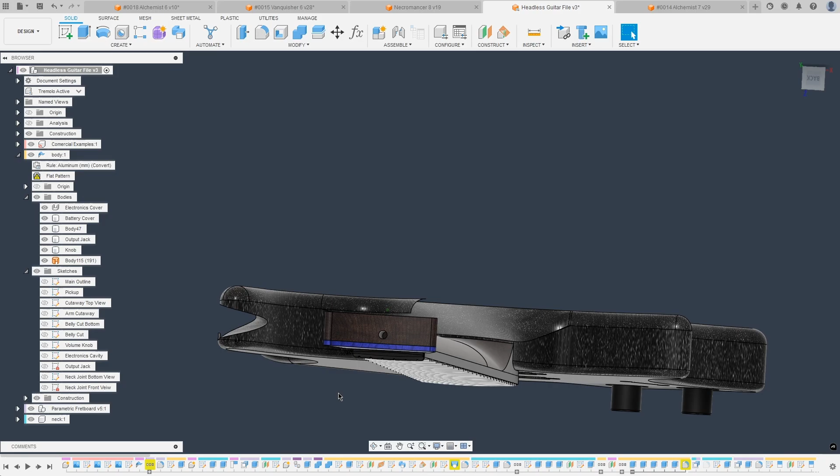Now that's actually what I was trying to show you 5 minutes ago, and that is sometimes with the delete face, it gets lost, it just loses one of them. Or I had this off quite often as well, where it kind of swapped them around. Just have to go back in, reselect it.

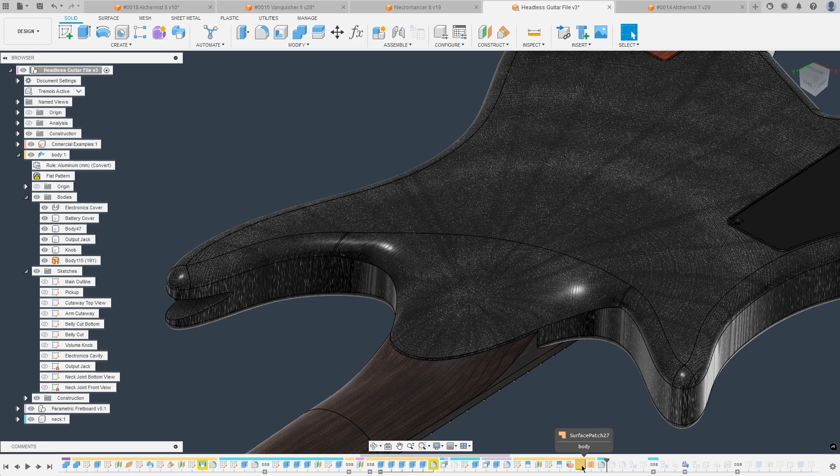And then now you can see that this almost matches up, but slightly off, and there's a warning here. And that is the surface patch that basically just never properly updates. But just going back in, reselecting the edges as we had them, clicking OK, that error is now also cleared up.

Now this delve into fixing Fusion errors was a bit brief. It is just really hard to show exactly how, unless I specifically fabricate you the errors. But I also don't want to drag this video on too much longer, as it is already very long. So I'm going to skip further explanation, and you can play around with it yourself.

The main thing you want to use is just right-clicking on the feature to review the warning, and then if it's lost references, you can usually right-click and re-establish the references. But otherwise, you just kind of have to figure out what went wrong, what didn't adjust itself properly. And by fixing something, even if you have 20 warnings and 50 errors, sometimes you just have to fix 2 things and everything works again. Or sometimes everything is broken and you have to start over. That's just the life of modeling stuff in Fusion that is a bit more complicated.

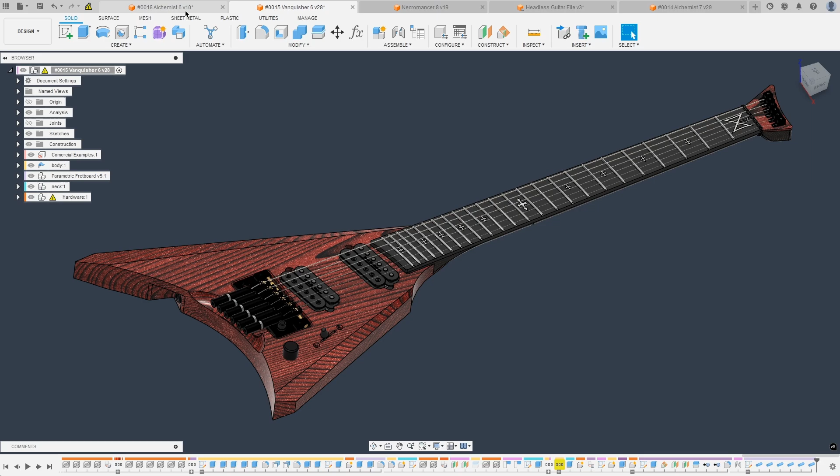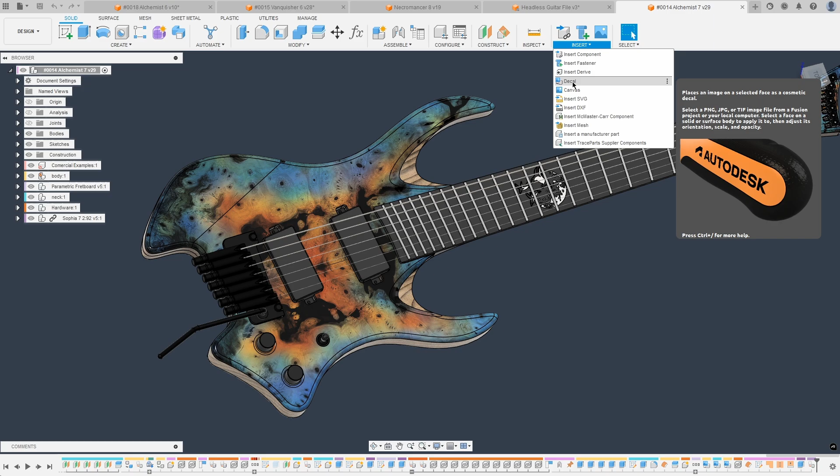And the way I achieved that is by using decals. By going to Insert, Decal, you can apply your own textures to your design, and I find that especially helpful for visualizing how the wood will look.

So my process for that is, if I have the piece of wood, I take a picture with my phone, trying to have the grain visible. I use some naphtha or mineral spirits to make the grain pop, take a picture as straight on as possible, and then bring it into Photoshop to make sure the colors are correct.

And if it is something I will be staining later, I actually do the stain as an overlay in Photoshop, so that's just kind of how it will look.

Then coming into here, I applied this as a decal. I select all of the different faces that I wanted applied, select my image, and then you can move it around to where you want. Hit OK, and that lets you visualize it.

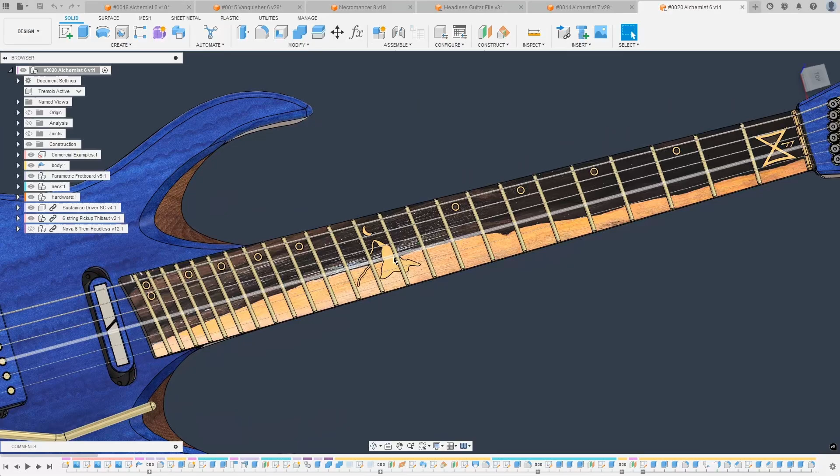Here's another fun example from an upcoming build, and as you can see, I've also imported the fretboard picture. It's not as great, but this let me show the client how it will look and talk about whether he wants that much white, or maybe we should move it a little. This way I can quickly provide a good visual, and you can go into the render space if you want an even nicer preview.

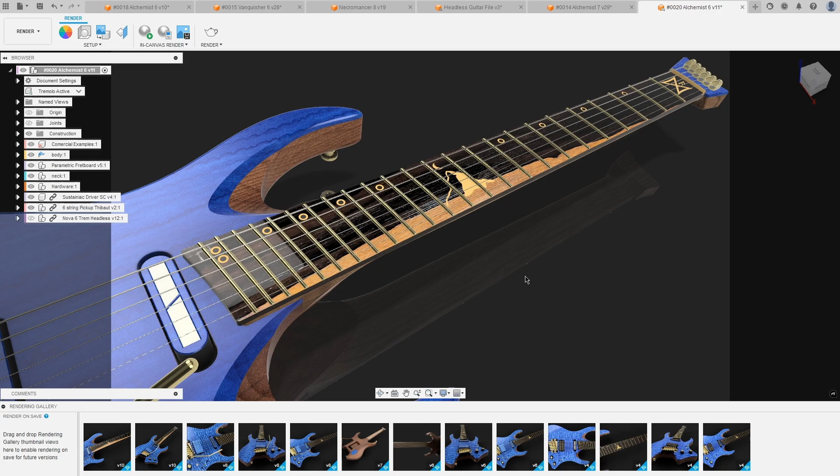This gives you a very nice visual representation of how the wood will look on the actual guitar in the end, as long as you make sure you scale it correctly. Sadly it always comes out as a glossy finish, and I haven't found a way to apply a different finish to the decals. They're always glossy for me, but I can live with that, since it's still a really good tool to give you a preview.

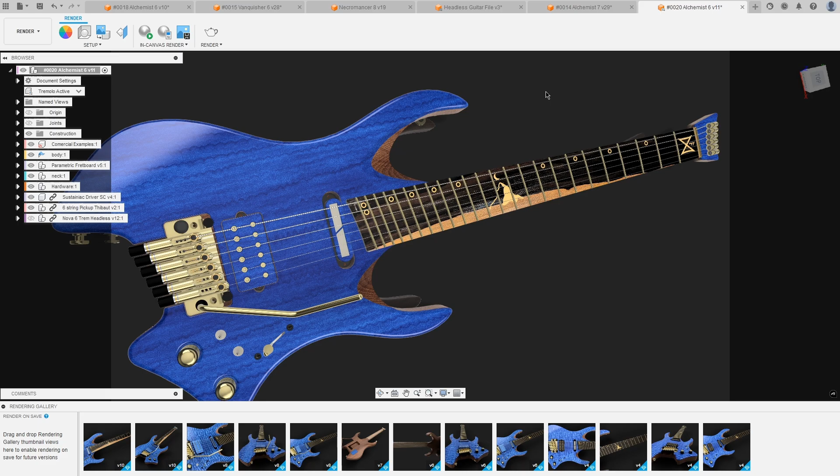Also, if there are any aspects of the designing process you'd like me to talk more about, I can definitely go into that. I haven't talked at all about the actual machining of it yet.

If you want a preview of how I approach the machining, the available file does have some sample toolpaths in the manufacturing workspace. Depending on what CNC machine and tools you're using, you'll most definitely have to go back and change some stuff.

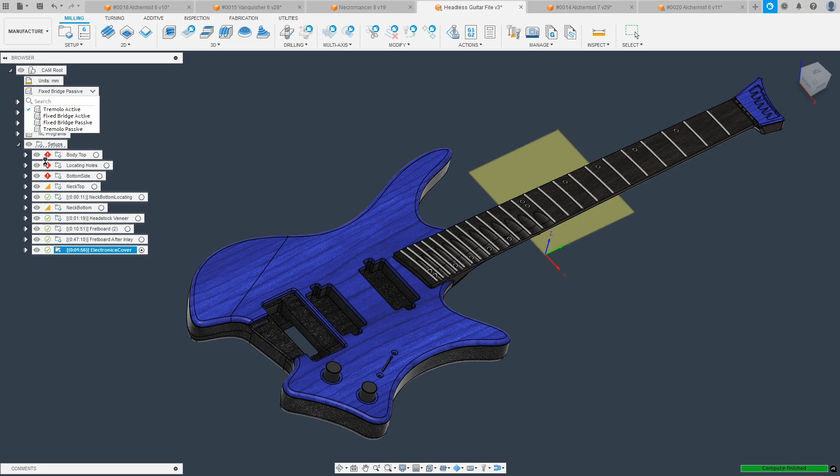Also, just because I changed the configuration—I believe I had it set to fixed bridge passive before—some of my toolpaths have already broken again, but in here you can see how I start off. These toolpaths were from my Killer Bee CNC, so not the new one.

But if you're interested, I can make a separate video about all of this, probably with my new CNC once I've gotten that figured out. For now, you can use this to play around with it and get some ideas of how to do stuff better.